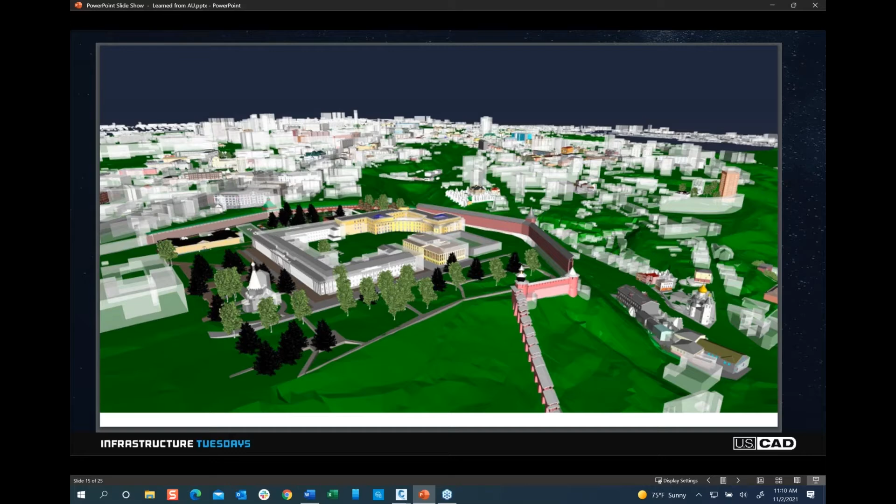So they had, go ahead and click to the next page there, Ron. Well, you can leave it on this page, but I want to talk about it for a second. They had over 2,400 people respond from all over Russia and into Europe. I think it was probably like 9 countries or something. I can't remember exactly. I have some of the data a little bit later.

So they started with these 2,400 people and it weeded out. Obviously, some people are going to drop pretty quick when they realize the extent of what they have to do to get free training. In the end, they ended up with just under 600 people who took it all the way through to the end. But over 1,500 people participated in building models.

And so what they did is they started by collecting initial data. They did aerial LiDAR scanning. They had existing Autodesk InfraWorks and AutoCAD data, just basic CAD files. Then they combined that data using InfraWorks and Civil 3D and ReCap. And then if you'll go to the next page, Ron. And then they did zone creation. I don't know that this product even exists, but apparently they had an Autodesk MapInfo.

I know that's been replaced highly, most people are using the Esri GIS, but there are some people with the Autodesk Map Info, and they're one of those people. And they took all those city zones and they allocated them to different teams of modelers. Whether that was Civil 3D or GIS, they basically created teams of those people together.

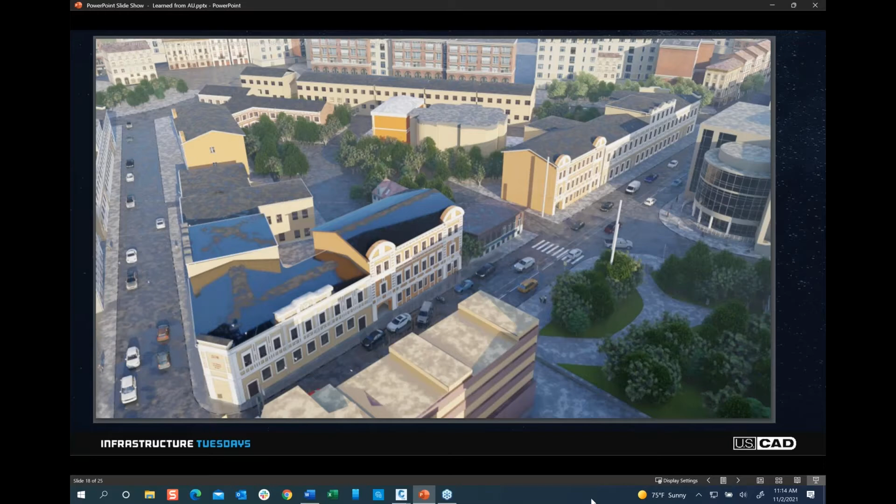So this is just an example of some of the close-up detail. They did some real detail. They modeled parks. They modeled buildings, and what's crazy is that these buildings were all in a zone by team, and they even had bicycles on the streets, and some areas where there's very historic outdoor light fixtures, they had those.

They did all this by LiDAR aerial scanning, and then they built these models out from there. It just blew my mind, all the detail that they actually managed to bring in.

Go ahead and click forward there, Ron.

So these are just some of the statistics. 2,000 plus people received new skills. 549 people went all the way through the entire training. Over 800 buildings were created. GIS, BIM, and SIM data was created. Over 1,000 people collaborated using Autodesk solutions for this city scale project. And this model is now a major source of data on the city's 3D web portal.

I can't even say how impressed I was. It was just training all these people. And on the training, there's more detail in their presentation, but they did YouTube streaming videos to train people. So I was like, wow, it was just really cool. And then they had all those recordings and people could access those for free. I was just completely impressed with this.

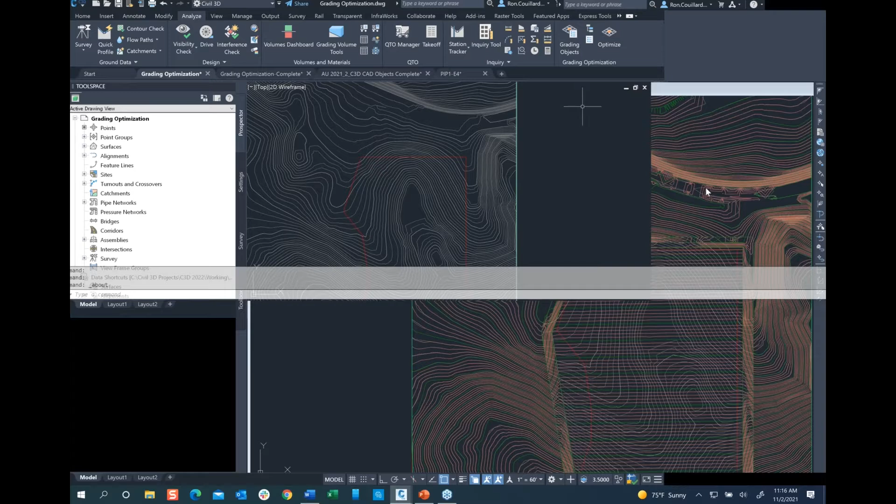Appreciate that. All right, I'm going to leave the PowerPoint here, and I'm just going to go over to Civil 3D and talk about a couple of areas that I pulled out of AU, which was grading optimization and the Project Explorer. I've got 3 classes that I went through and got information from, which, like Katie said, at the end we'll put those in the chat. But I'm going to start off with grading optimization.

For those that haven't seen grading optimization and don't know what it could do, I'm not going to go through a click and pick of grading optimization. I will show you a few things here and there, but I want to show you basically what you can get with grading optimization, and also discuss some of the tidbits that I got from these classes, because I'm telling you, some of these classes were the most informative sessions that I've been in. It really hits the mark for customized training sessions and things of that nature, because you get to pull some things out that you might not normally get.

So that's the avenue I'm going to take with you this morning, this afternoon for some of you, is basically what I got out of these sessions. So the first one was the Handyman's Guide to Grading. This one was an awesome class. The presenter did a really good job on showing workflows, how he actually uses grading optimization. And that's where I got the most tips and tricks from.

The other class, which was Grading Optimization, Civil 3D 2022 Residential Development Success. It's a great class if you're getting into grading optimization for the first time and you want a clicks and picks type of tour, and it'll take you all the way through the project that they have. This first class will do the same thing though, but in my opinion, between the two, this first class I got more tips and tricks out of. So I'm going to talk to you about what some of those tips and tricks are.

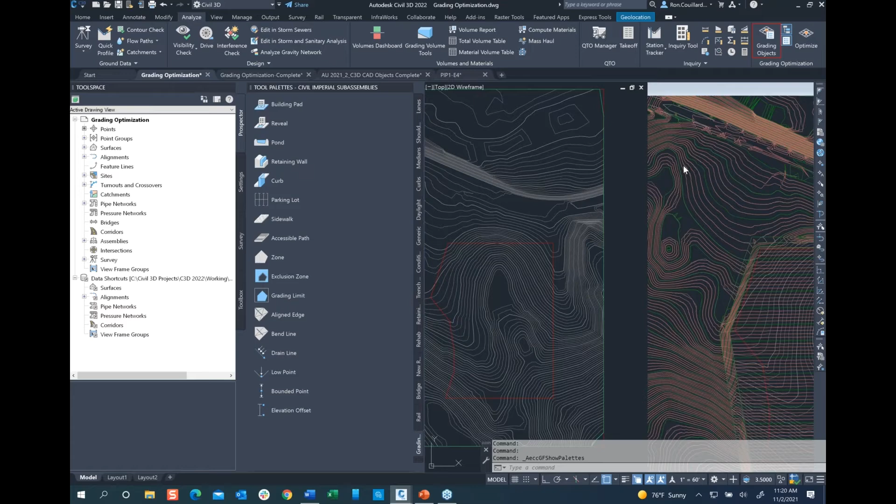It really is. So with that being said, I see this huge list of things, what do I do? Drag and drop, what do I do? And what am I ultimately gonna get? Well, let me pause it there real quick and show you an example of one that I did on this same site, where I've got my red line as my grading limits. Once I went through the grading optimization and got it complete, the ultimate goal was to get a new design surface out of grading optimization.

You can see the results here on the screen. This entire site got graded out, and then you can see the edges of the grading merged in. So this was a very simplistic example of what you could get with grading optimization, but I just wanted to show that for those that had not seen it yet. So with that being said, I'm going to talk about some of the tips and tricks that I pulled out of this class called The Handyman's Guide to Grading Optimization.

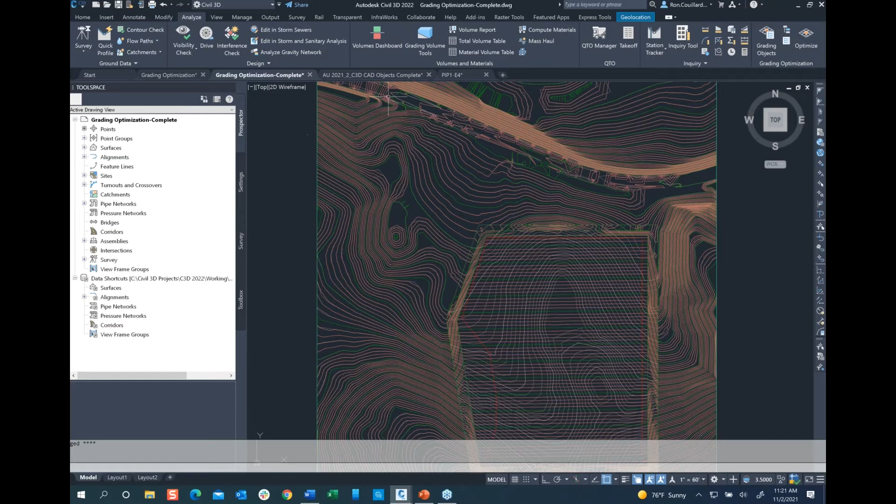I actually downloaded a drawing from his data set because one of the tips that he talked about was a workflow tip, which I thought was amazing. If I had a poll, or if I was right in front of you, I could ask a question and see how many hands would go up. How many people would typically be using a site plan that they're getting ready to apply some grading to? How many people would use hatching? I don't think a lot of hands are going to go up, right?

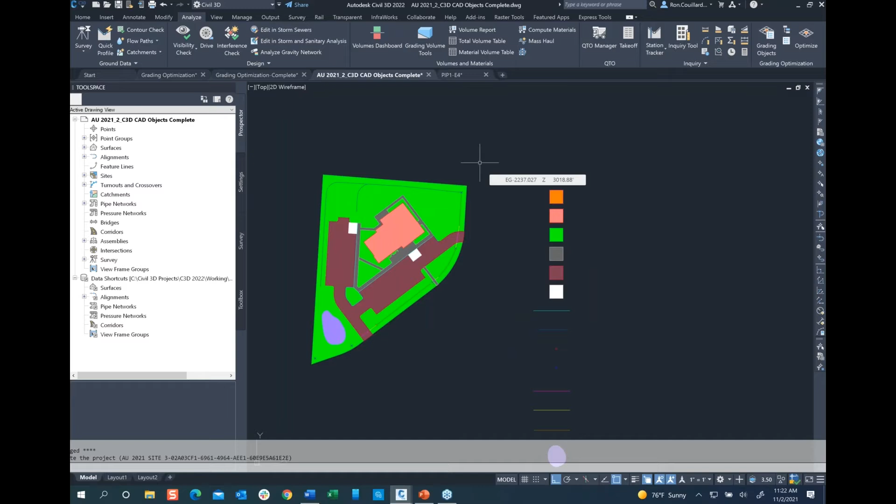You're probably going to use hatching for exhibits, things of that nature, what we tend to call the artsy fartsy stuff, make it pretty, right? But how many people would actually do that for this type of plan? Well, this presenter did, and I thought it was amazing how he utilized this in his workflow. And basically what he did, I'll show you this.

Each color over here represents things like paved areas, landscape areas, a building footprint, okay? Basically all types of things that you could apply grading objects to. So what he did that I thought was so cool was he came over to his legend here and he clicked on the polyline that is the border for the hatch.

He did a simple right click and select similar in AutoCAD, and now he's got all of his landscaping selected. Why is this important? Because in grading optimization, you have to select the objects you want to apply a grading object to. By doing this, he's able to use the hatch boundary as a multiple selector.

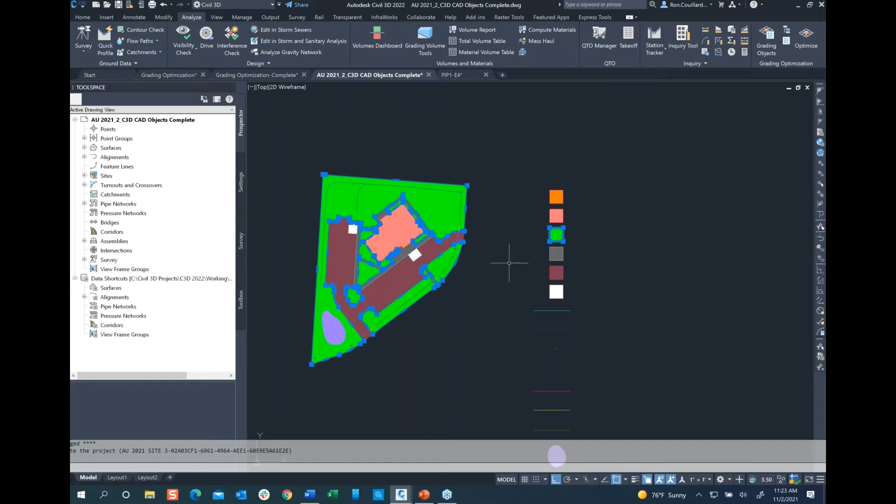I thought his choice on this workflow was interesting because not only is he going to apply grading to this, but he's also got an exhibit of the site plan working. By having hatches in his drawing, he's really making it easy to select objects. So check it out, I'll show you how this works because it can save a ton of time with the results on your grading optimization.

If I go into grading objects, I'm also going to show you another trick that made his workflow really interesting. We've got the different grading objects on our palette, and if you look through the names here, you can see a lot of the common culprits - ponds, sidewalks, parking lots, and things of that nature.

But one thing he pointed out was there's no landscape area. What if I wanted to have my own landscape criteria for grading objects? How could I possibly do that here? Well, it's something so simple a caveman could do it. When he showed this, I was like, why didn't I think of that? You ever had one of those moments where somebody shows something so simple and you're like, I should have thought of this?

What he did was he went over to the zone here and did a copy on the zone, and then he did a paste.

And then on this paste, he went into properties. He went ahead and put in the name that he wanted, like landscaping zone or something along those lines.

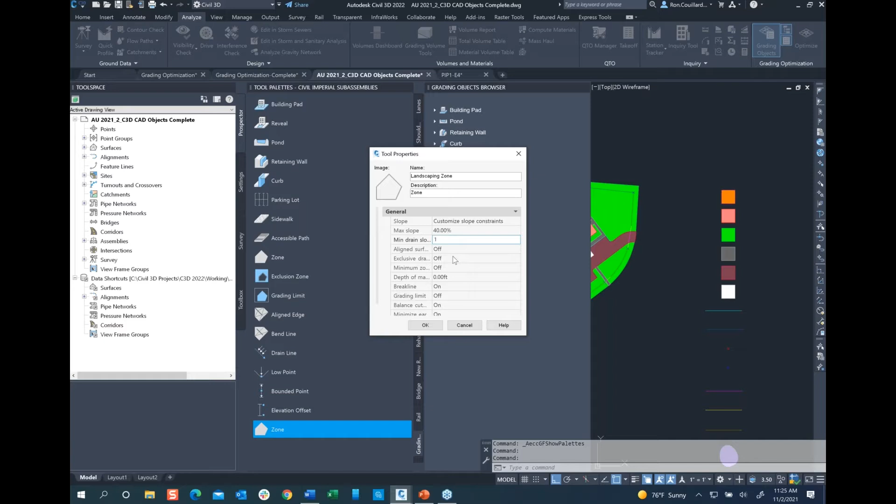So then he says, okay here, and check it out - you've just added a new grading object to your tool palette, which, like I said, so simple a caveman could do it, but I was just amazed how that could save a ton of time in the future.

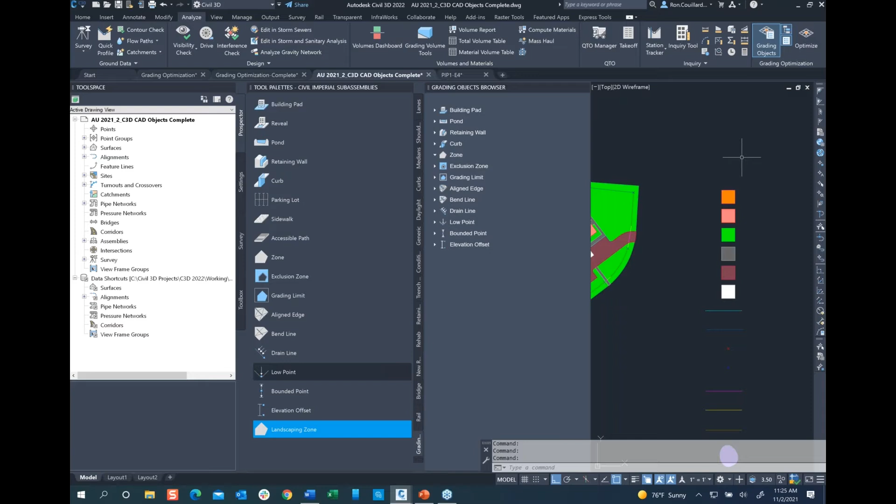And to apply this, what he did, like I showed you guys before, selected his outline, then did a right click, select similar, so that all the landscape objects could be selected. And then by clicking on the Landscaping Zone that's in his tool palette, just like that, grading was applied to multiple zones at once.

So there's my next tip. I didn't know that could be done - I thought you had to select one zone at a time. When he did that, I'm sitting there looking at his grading objects browser and I'm like, whoa, he just did 9 grading objects all at once just by using some AutoCAD functionality. How cool is that? Just some simple things, and I was totally amazed with that.

Another thing that he talked about, which some of you may already be aware of, but I didn't know this could be done - and that's with the curb tool. You can actually flip the curb to the other side. So if you're looking at a typical cross section for a street, you've got the gutter line flowing down up to the crown of the road. But if you're doing something more like a median, and you need to flip the curb to the other side, you can do that with this grading object. I was blown away with that one, I didn't even know you could flip the curb in this.

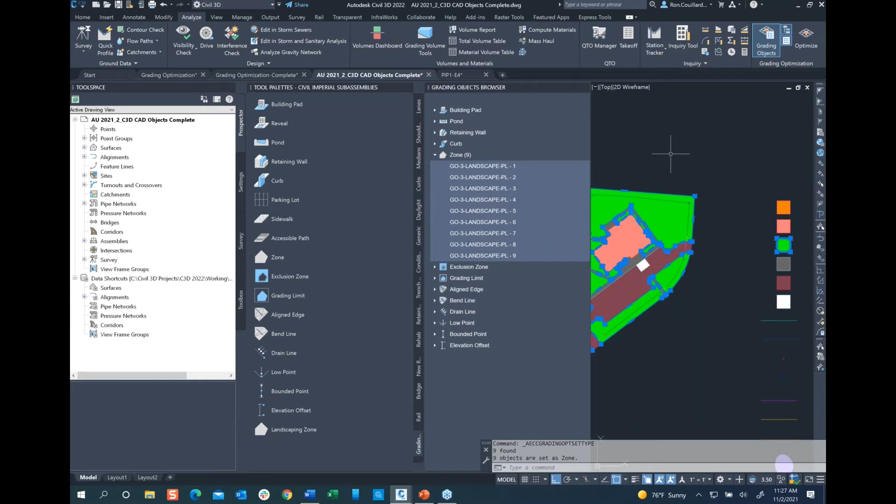But ultimately, like I said before, the desired output from all of this stuff - if I go back to the grading optimization complete real quick, I'll show you this. Once your optimization has been done, you have the ability to take that grading and create a brand new surface in Civil 3D or merge it into an existing surface that you already have. So just to show you what I did on this particular example, I'm going to close my grading objects real quick.

What I did was I outlined my site, and then I did another outline on the outside for the grading limits, and I generated two drain lines.

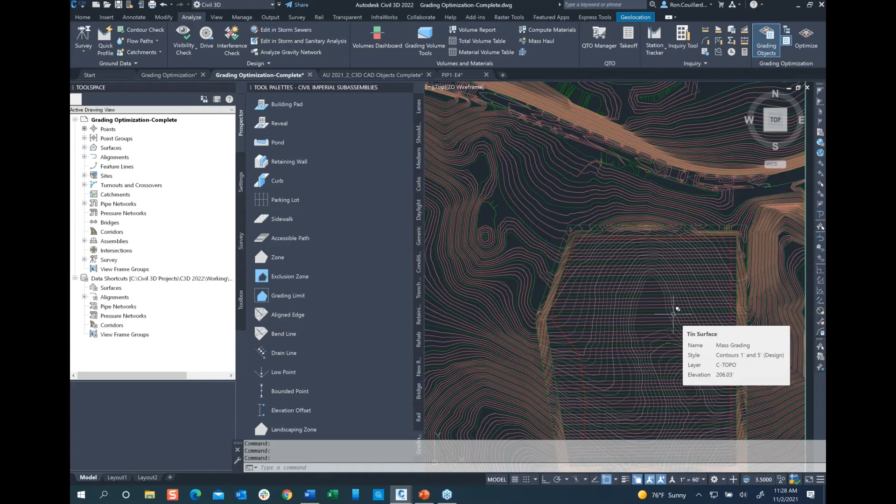Now, a couple of things about these grading objects: the majority of them must be closed geometry. So things like zones, grading limits, ponds, things of that nature, they must be closed geometry. But drain lines must be open geometry.

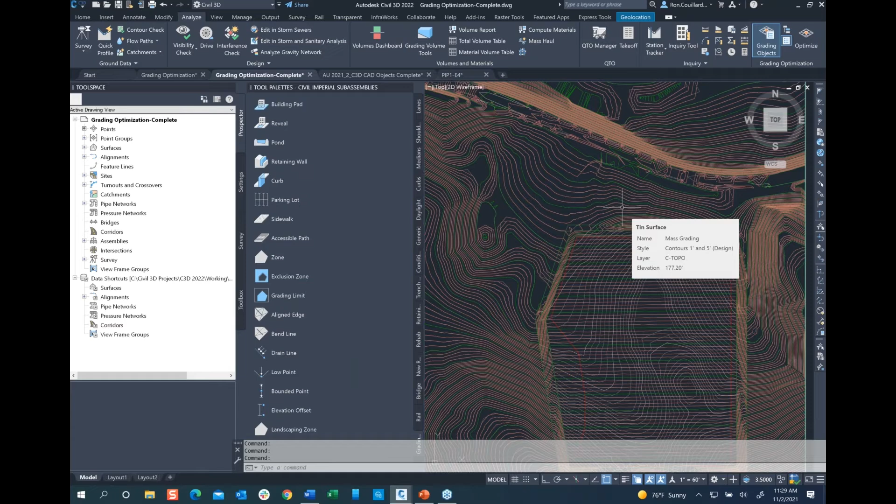And the reason for that is drain lines are basically line work where you're telling the software the direction that you want to drain to.

Let me go back to this first drawing. I believe what I did for drain lines in this one was basically draw a couple of polylines on the north side of the site. It's actually draining from south to north based on the contours here. So basically the drain lines just tell Civil 3D where to drain to.

Overall, the nice thing about grading optimization is that you're not really generating 3D items. I mean, you can with some of the grading objects, like a building pad, for example. If I look at the properties on a building pad, it doesn't have to be 3D, but you can give it an elevation if you want. You can see there's depth of material, level grading is on, you can turn that off, and then elevation.

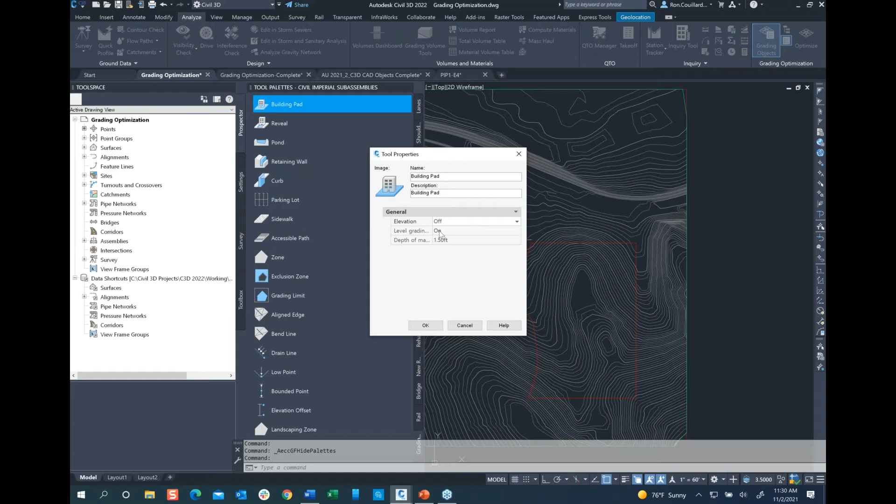Okay, so other than that, really, if you have a surface, you define your limits, the area that you want graded. There's other things you can do though if you want to get more into it.

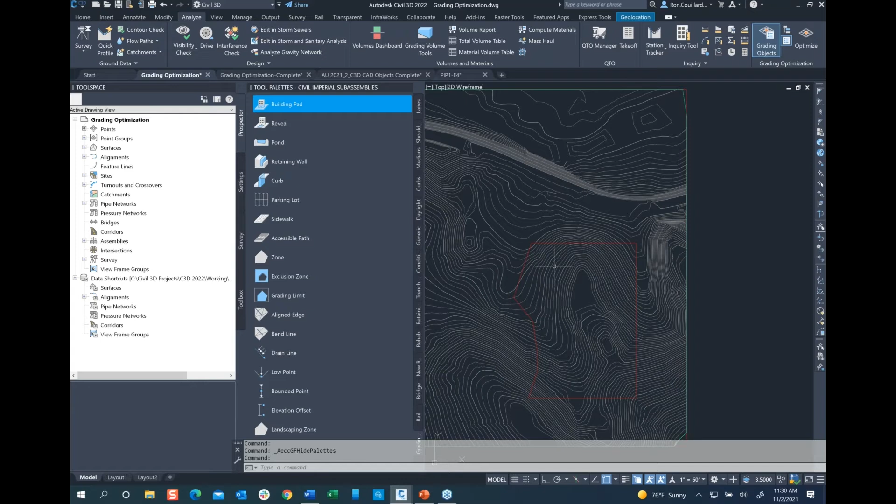Like what I'm showing is if I just wanted mass grading on this whole site, but in the class that was done, they graded this whole area. They did separate landscape, a building pad, sidewalks as a separate object, all the pavement as a separate object, they even identified a pond, and the presenter joked that might not be the best location for a pond, but you get the idea.

So those are the things that I learned. A couple more notes, and then Katie, I'll let you finish off on your items on GIS.

One of the things they mentioned is that the order grading zones are put in is important because there's actually a priority - the last one in controls constraints that are applied to that area.

So you're going to want to make sure you add things in a chronological type order based on how grading optimization - or I guess the cool kids are calling it GO now, I don't know - because grading optimization is kind of a mouthful.

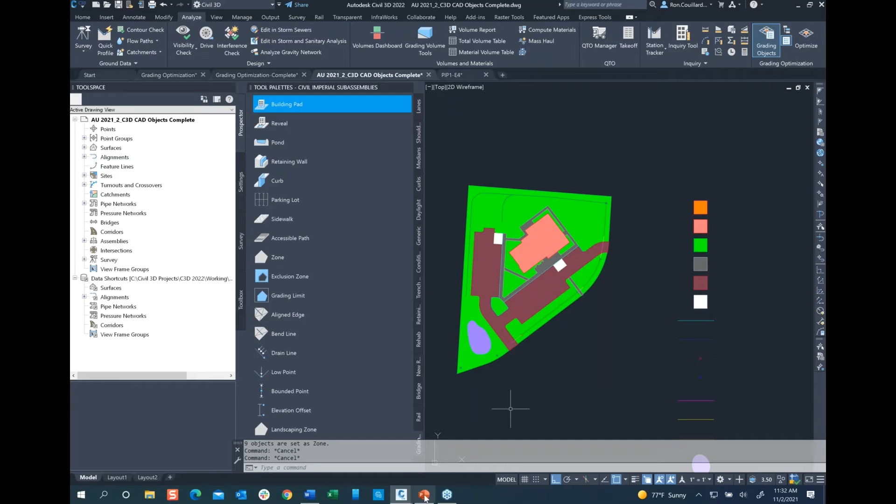And the other thing was the copy paste zone on palette and then renaming it for further use. So those are some of the things that I pulled out of AU this year for grading optimization.

All right, Ron, that was awesome. So I was going through different AU sessions trying to see what was related the most to GIS. And I ran across this session, which isn't necessarily what you'd call a true GIS session, but I was thinking about this a couple weeks ago, and I thought this is definitely a session that was timely.

Autodesk has had this product called Raster Design, and it's been around for years and years and years. It even had another name before it was called Raster Design. It's as old as AutoCAD Map, maybe even older. It's a very old product.

But one of the things I truly believe is that there are two very unused products for people who own Civil 3D or have like the suite, a collection of products. And one of those is AutoCAD Map.

Last month I did a session on transforming and planning with GIS features inside of Civil 3D, or using AutoCAD Map. So AutoCAD Map is definitely one that everybody has, and they don't use the features enough.

But this is the other one - almost everyone owns Raster Design. Whether you have an AEC collection, it's included with it. If you have an AutoCAD collection, what do they call it, the AutoCAD with multiple tool sets - if you have the AutoCAD with the tool sets, you also own this product.

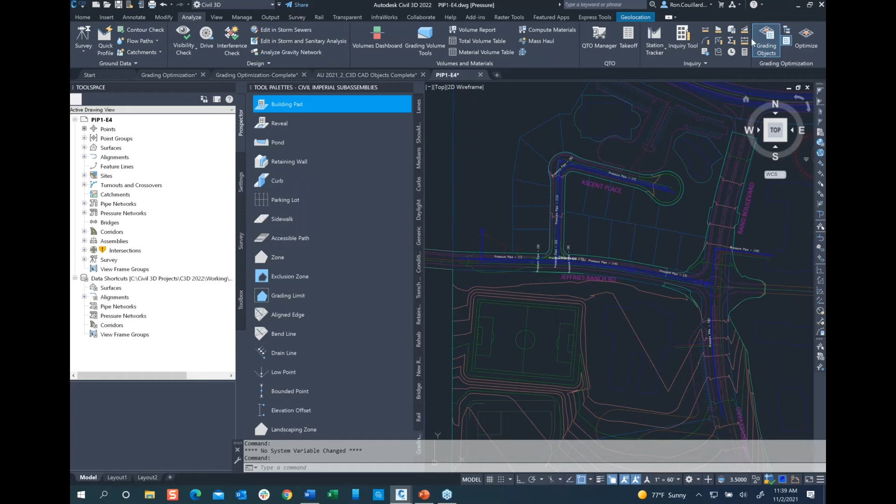Excellent, thanks Katie. So I'm going to jump back into Civil 3D real quick and talk about Project Explorer. I watched a class on Project Explorer called Project Explorer Constant Companion 2021. I'll tell you what, if you haven't seen Project Explorer, it is the bomb, it's awesome.

A few things I picked up on it I'll talk about, but first I'll go ahead and open up Project Explorer. For those that haven't seen it, it's basically an interface that gives you one window for all your civil objects with a ton more power than the Prospector can give you. It has a viewer, different tabs for the different types of civil objects, and even a feature line editor tab which lets you see problems with your feature lines. It does come with the AEC Collection, and even if you don't have the AEC Collection you'll see a button for it.

Unfortunately it's a separate install, so you have to get it from what used to be called the Subscription Center, your Autodesk account - you have to download and install it. But I'm telling you, this is one of those things - when Autodesk comes out with new things, sometimes you're like 'oh that's cool.' This rocks because of all the power it gives you.

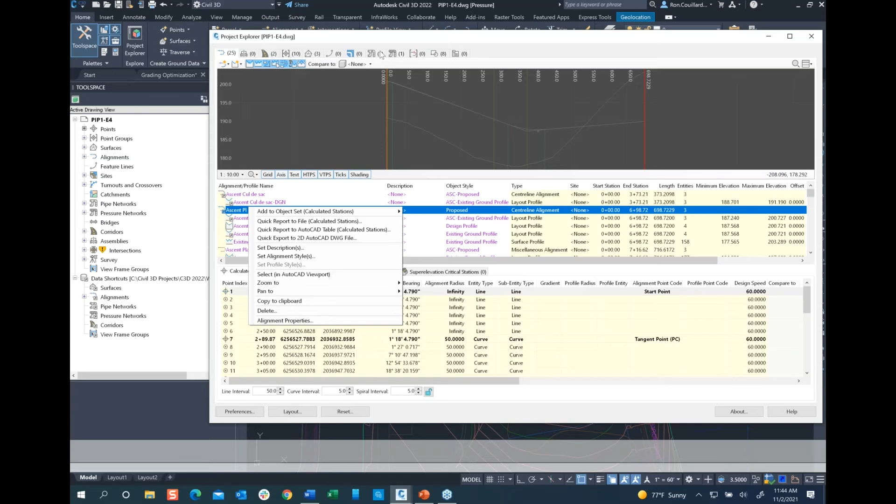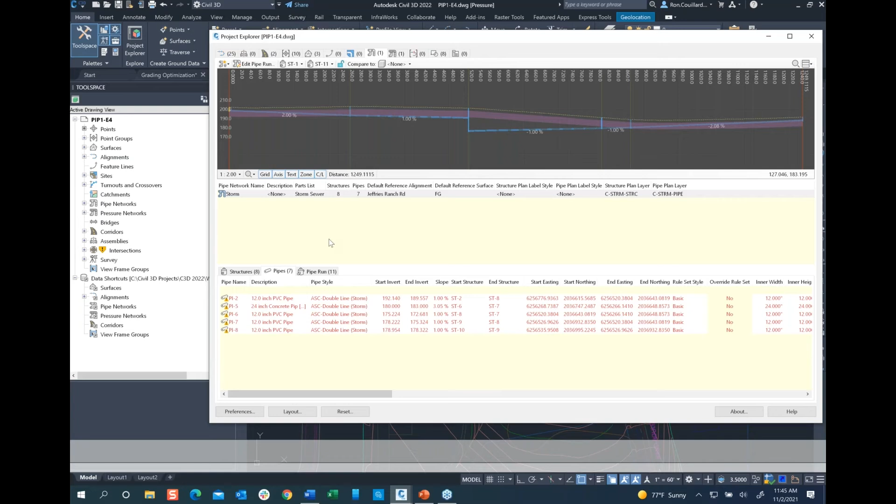You know, if I take a look at pipes real quick, for example, and I click on—this is taking a little while to come up—but once I click on a pipe network, I can see the entire run. I can see structures down the bottom here, I can see pipes down the bottom, and I can see the entire pipe run. So pretty cool, because you've got all your data right in the one vista, and we can make changes here as needed, which is just phenomenal to me.

Also, check this out. I guess in all the presentations I had seen before, and with some of the drawings that I'd used before, I didn't realize you could see your pipe network violations right here. Well, this one has more violations than you can shake a stick at. So notice I've got what I like to call the Civil 3D badge of shame in there, my orange little triangle. When I hover over these, I can see the badge of shame, and I can see all of the violations of the rules we have with our pipe network.

So that's pretty cool. Bottom line, you can do so much with this. You can get reports spit out, you can edit objects, you can do all kinds of things with it.

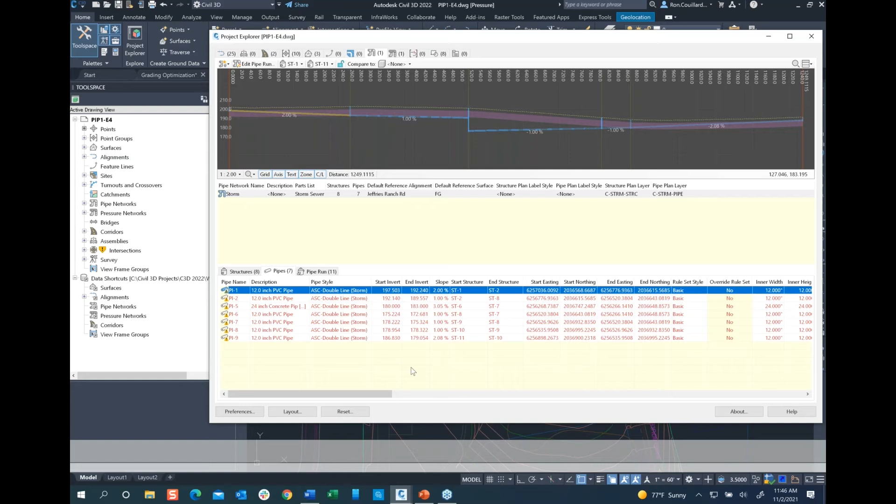And the final thing that I learned on this that I thought was so cool—I'd seen this done before, but it never really sunk in—if I click the layout button, I can actually change the columns that are displayed. So if there's specific columns I don't want to see, or maybe one thing Civil 3D does right out of the box is it likes to put easting before northing. If I want to change that, I can use the arrows on the side, and I can customize all this the way I want, then turn around and save it out.

So the one thing Russ talked about that I really pulled out of the layouts is the fact that I could configure different layouts for different situations and save them out with different names. Things like if I'm trying to do a project stakeout and I need station and offset reports and things of that nature, I can configure my layout different than if I just want to look at a PI report or something like that.

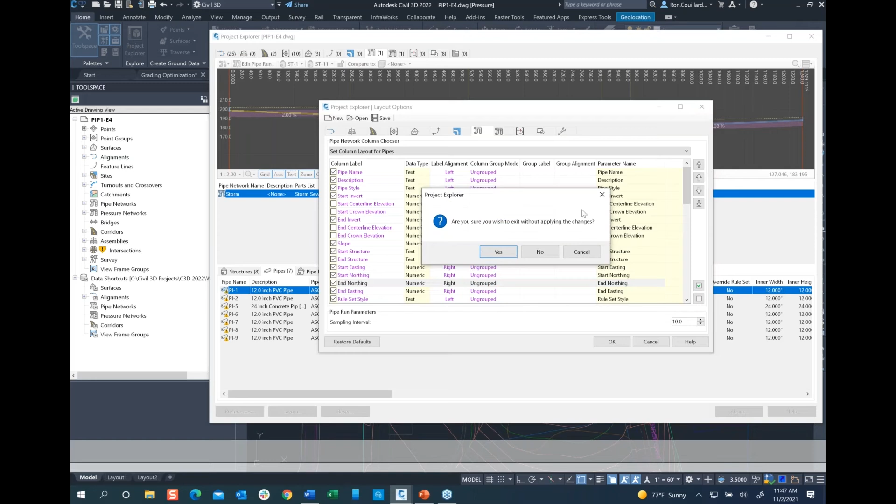So really, Russ did a great job showing me—showing everybody, it wasn't just me—the ins and outs of Project Explorer, and I really pulled out some interesting tidbits.

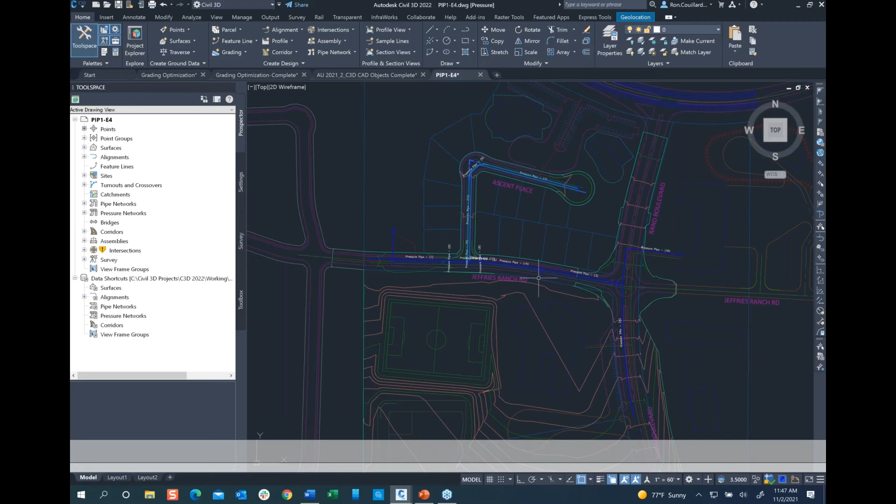Okay, so let's see, am I sure? I'll say yes to this, and I'm going to get out of Project Explorer. I think we're looking at—I usually like to end 10 or 15 minutes beforehand to see if we can answer some questions. So before we go into that mode, Katie, did you have anything you wanted to add?